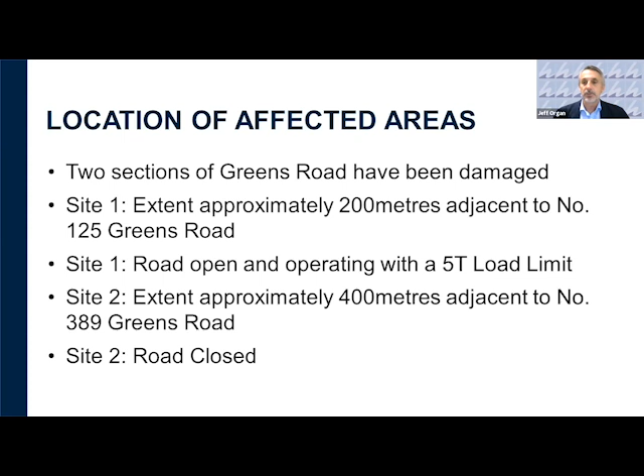So I'll probably hand over to Gareth now, who's doing the presentation. We engaged PSM - they're a highly reputable firm of geotechnical engineers that have done significant work for many years across New South Wales and Australasia. I'll hand over to Gareth to start his presentation.

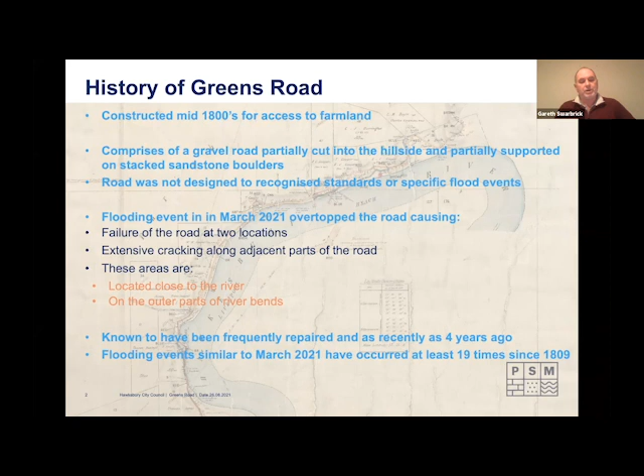That overtopping, as I mentioned, is a key factor — normally the road is able to largely sustain flooding, but in this case it has not. That overtopping is a key design event we want to be able to say we've designed our road for, that it can handle, because they can happen quite frequently. Anecdotally I think it's happening more and more, but we don't have enough historical data to prove that.

So Jeff mentioned the two sites — just to reorientate yourselves if you're not sure: we've got Site 1 down here, which, as Jeff mentioned, is just before Juniors, that's the one with the 5-ton load limit. Then Site 2 is further up, which is currently closed.

As we're saying, these are located on bends, but importantly you can get an idea of how steep that terrain is just the other side of Site 2 and Site 1. They're really in sort of nooks, tight spaces where there's not a lot of room to maneuver.

When I first went out there, there was actually around 80 meters of cracking. When we went back for a second inspection, that had grown to 260. When I say grown, it wasn't cracking we'd missed, although there was probably some of that, but the majority was new cracking. That instantly told us this was a site that had not finished — it was still moving and there were still effects ongoing.

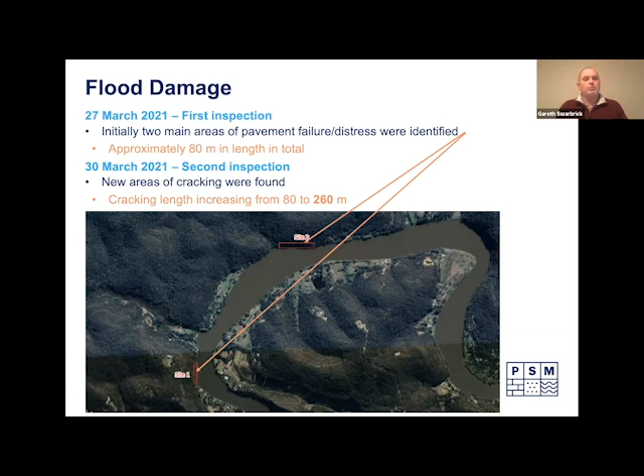The work we've done so far is to visually map the observable cracks. We have those in 3D in AutoCAD and GIS type programs. We've done drone surveys to provide high quality imagery and assist with the cracking survey, using the drone footage to go back and track the cracks and map them accurately in 3D space, so we can see where they are, what they look like, and how they've progressed over time. We did hand augering and penetration testing to bedrock, and you can appreciate the load limit applies to us as well.

So it's not like we could get machinery out there to actually do the sort of deep penetration testing that we wanted to, particularly in the short term. So a lot of that was done by hand when that was the only type of access we had.

We then were able to get a fairly light truck mounted rig that we used to drill, I think it's about 30 odd boreholes, and Greg can correct me if I haven't got that quite right. That's roughly how many auger holes we drilled, just to get an idea of what the site looked like beneath the surface. We also did some test pits with an excavator, which gives us a greater perspective, because you can uncover more material with an excavator. And again, they're fairly easy to use. But we had to be careful about the size of the excavator that we could use.

We also commissioned a bathymetric survey by a company out of Melbourne that could profile the riverbank below the surface - the riverbank, not bed, sorry. And so we used that in combination with our surface survey that the council had done as well, and we stitched that all together to try and get the most complete picture we could about what the geometry of the site looks like.

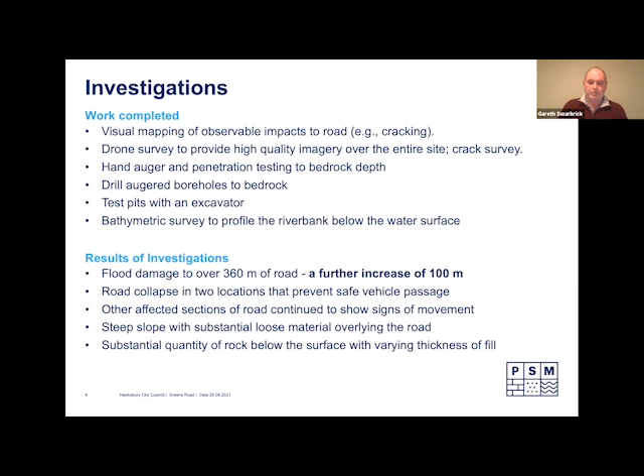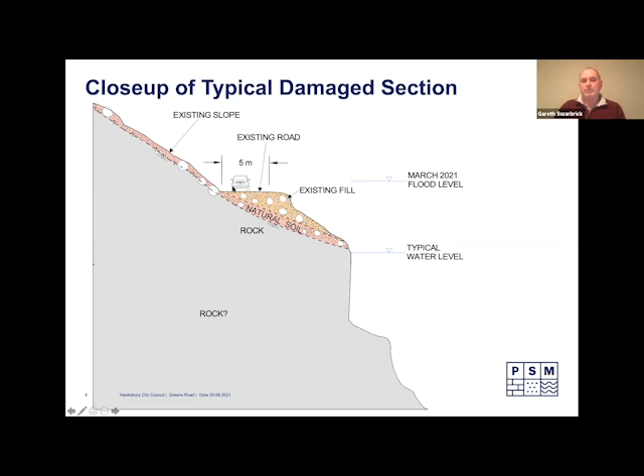If the water level stays down here, then we're not going to see much impact. If it goes above this, but not too high, it might cause some temporary wetting. But when it gets up to the sort of March 2021 level that we see here, we've completely saturated this fill, and then it becomes at its most vulnerable and weakest because of that water that's not normally there. Normally the water is diverted away from the fill in various channels and drains, and the fill is prevented from wetting.

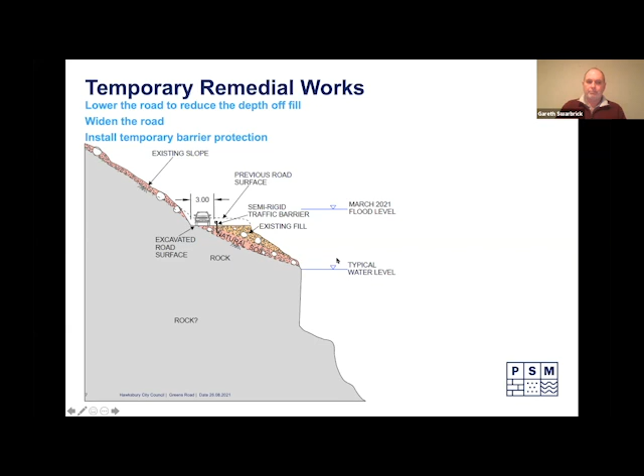So the permanent solutions, what have we been looking at? This is what we see the requirements need to be - as well as those obviously take those loads, which I haven't written here, but it's implicit in our design.

We need to make sure that whatever we do can sustain the traffic that's normally there, and also the construction traffic. So when you want to do repair works as quickly and as cheaply as possible, you often want to use the biggest machinery. So that's a consideration as well - we may be designing this road to sustain the heaviest loads it might be required to sustain, could be construction loads, for example.

But the other requirements we have - it's obviously got to survive these floods, and we see that as a key factor. So just going back and putting what's there now, as a group - and when I say group, I'm talking about the people at council and ourselves and others - we felt that it needed to have something that is going to sustain, be able to survive the type of flooding that we saw earlier in March.

It needs to meet acceptable standards. I'm an engineer, I'm bound by the codes of Engineers Australia, and so I need to put forward something that I feel meets the engineering standards of the day.

It's a very tight space, so we need to think about how we can construct in that space. You can see the drop-off we saw into the riverbed. We could try and build off barges. That could be a way of doing it, but that's obviously something else to think about in terms of cost, etc.

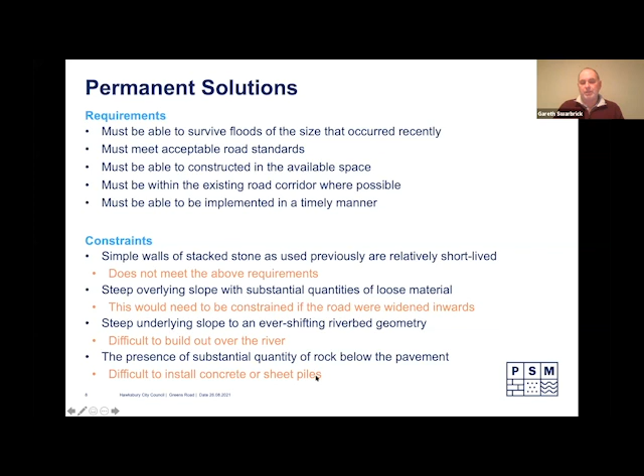Let's go through some of the solutions we've been looking at so far, so you get an appreciation of how they stack up with the slope we showed you previously.

One downside is that we really want the water to be able to come out of that fill if it gets overtopped, because if that wasn't allowed to happen, the piles would have to take the extra pressure of the water, increasing the cost. So there are a few things about piles that aren't necessarily conducive given other factors at our site, plus we have rainfall coming down the slope as well that we have to deal with.

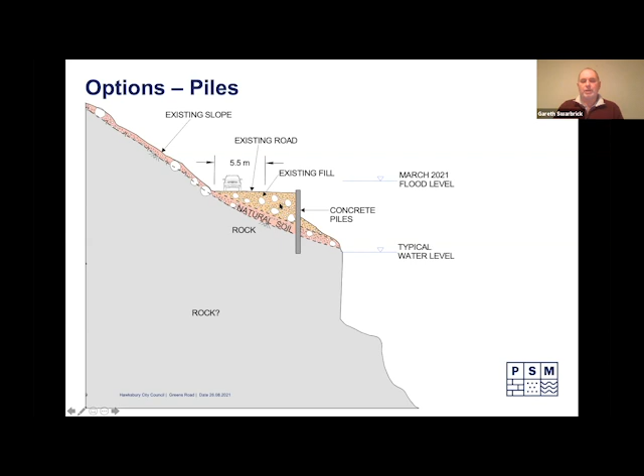This is another solution where you have piers, shorter piles which aren't cantilevered, providing a floating bridge deck type solution. It's a bit like the solution down near Stanwell Park, the ocean road that goes out over the ocean there. You can readily see that's probably quite an expensive option, but it is an option in terms of keeping cars safe and taking away the issues we've been discussing.

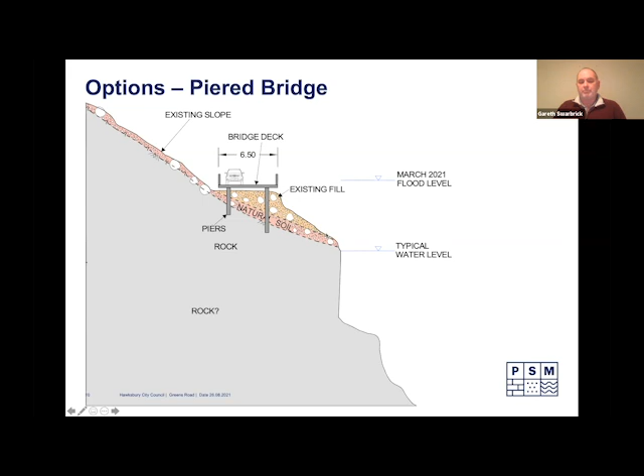There's another option looking at interlock blocks—a kind of stacked stone solution, but designed to be permeable and interlocked. They're at a fairly flatter batter angle, which means they can tolerate more load due to flooding and things along those lines. That's another option, and you have to design that also to be permeable to let the water through.

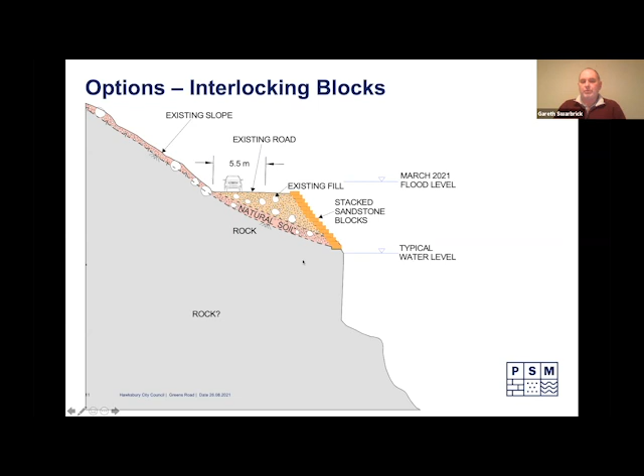There's also the option where you move entirely away from this area. So you then cut into the slope and have a shotcrete face with bolts or nails - we often call them that because they're often going into soil rather than rock. That creates a space through which you can have your traffic, keeping well away from the problematic area.

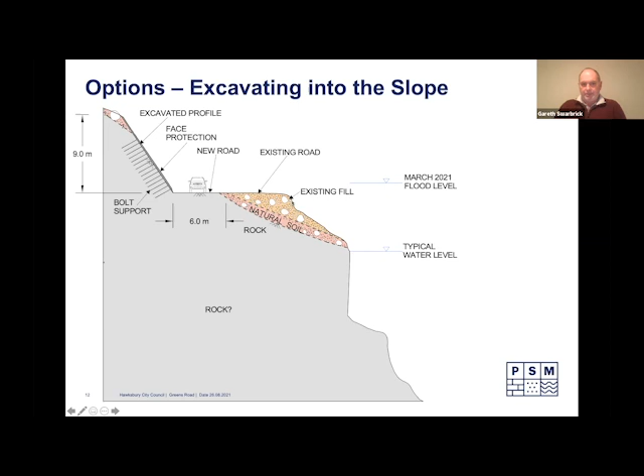This is another solution that may not be that familiar to many of you, and it's a different way of approaching the problem. What we have is a wall, typically created out of interlocking blocks, but the wall has connected to it reinforcing strips, and those strips are built up with the fill placed behind the wall. Those reinforcing strips actually hold the wall in place.

So you're creating a reinforced earth, and that's the terminology used for this type of material. That reinforced earth does a few things: it creates a fill which is a lot stronger and more robust than the fill would otherwise be, and it also has the ability to hold a more vertical wall. So this wall can be near vertical - typically it's 1 in 8 - but it gives you more space compared to, say, the block wall I showed earlier, which had to be flatter to create a more stable and safe supporting system.

So this is quite an attractive system because of this dual effect of the fill. It's also a system that can be built in a range of different conditions, and it's something that we find quite attractive at the moment.

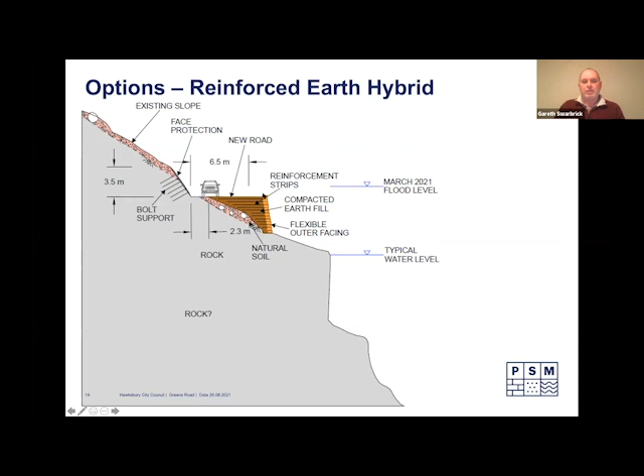And that's just the same solution. I think we actually missed one - there was a solution where we've only got the reinforced earth, apologies, and that comes out further rather than this combination. So this is really the combination between this cut and the reinforced earth, but you can imagine I could take that out a bit further if I wanted to avoid cutting into the slope in this particular location.

So that's the last of my slides - that's the solutions that we've come up with thus far. You can probably tell by the way I've talked more to this particular solution that I kind of favour this at the moment. It's got quite a few advantages associated with it, but we haven't set in stone which solution we're going to go forward with. Fairly recently we presented these to council to consider.

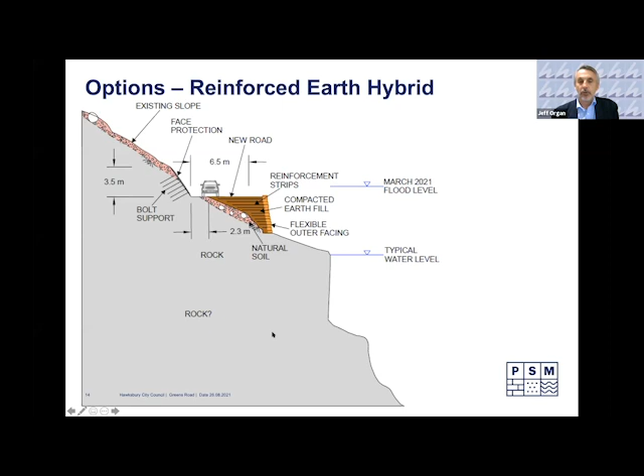Thanks, Gareth. As I said, the team have gone through fairly extensive work, and there's still a bit more to do to start to refine those solutions. Tonight's probably about getting some feedback from the community as to any issues that might be associated with some of those options - we're happy to take those on board when we get into the latter part of the evening.

I guess one of the things I've always taken away from Gareth's presentations and discussions is the fact that safety is really paramount - and you'll see that term used in correspondence. This is no longer a farm track. It does have vehicles on it of varying types - we've got school buses and all sorts of things, and we certainly know that community access is really important.

But one of the things I know as human beings we're really, really bad at is assessing risk. We all think that something is not going to happen, and that's something that, as engineers, we've been trained to understand is a failing - you've actually got to deal with that at a real level, rather than saying it'll be right, that'll never happen to us. So if we're risk averse in some of these things, we probably make no apology for that. I've said to a few people, I have no desire to be in the coroner's court explaining why somebody drowned in the river.

I think the other thing I've taken from some of the work PSM have done, you can see that vertical slope still sitting there below water level—that's not obvious to most people. The other thing I'd emphasise is that it's highly likely we're going to continue to get more movement of the river route itself. Both of these sites are on the outer bend of the river, and from an engineering standpoint, water in a flood will flow much faster around that outside curve—it's got further to go than the inside. That's why you typically get build-up of sediment on the inside of a river curve, and it's always eroding on the outer edge. It's those velocities.

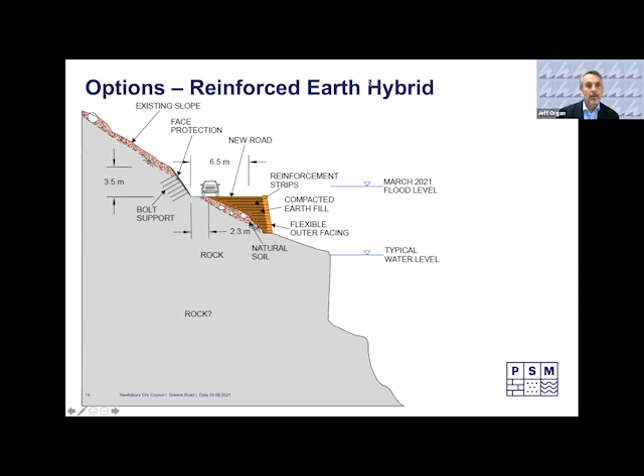So let me just go back to where we were. Share the screen again.

So the next steps we've got to look at are the options for remediation. We've gone through what we're terming interim or temporary works, and we've got to look at how we might implement those with minimum impact. What Gareth went through in those interim works is essentially cutting down the width of the road temporarily and cutting into the embankment. We do have some constraints on that embankment—we're not too far from the National Park, and there's property ownership there. It's not an easy thing to go and build a road in a national park for very good reasons. There are very strict protections on national parks, so we can't go too far in there, even if the engineering wasn't problematic.

So we think that if we were to do temporary remediation works at both of those sites, they'd probably take around 3 to 4 weeks. What we don't know—and whilst Gareth's done lots of drill holes and test holes—is that you can have anomalies between any of those points. So when we're doing those works, we don't know exactly what we're going to find when we start digging, particularly in what has been built up over many years. We're likely to find possibly some aberrations within that profile, so we can't be certain how long that will take.

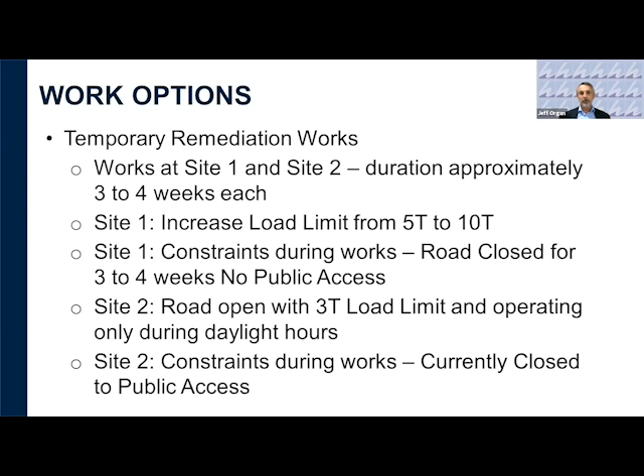And again, we'd have constraints during the works at site 2 as well. Probably not so much of an issue, other than the construction period would still need to remain closed—but that's no different from the current situation that's causing some of the grief.

As Gareth indicated, we're going through and doing that design work for both Site 1 and Site 2. There's probably a strong preference for an option within those we do have. A number of these would probably take 3 to 4 months at each site to construct, subject to no further cracking and the full extent of works being identified.

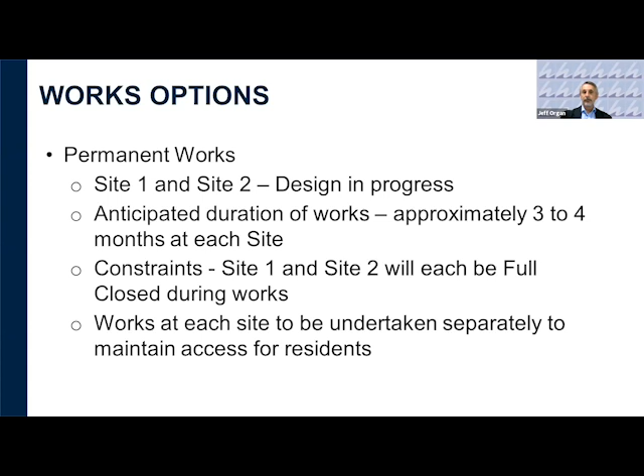Again, during construction, both sites would need to be closed to traffic. Obviously we could do them all together, but that would make access for all residents extremely difficult. It would also make construction probably a little longer because we wouldn't have access for our own purposes to get fuel, machinery and plant in. So sequencing is going to be key to minimising further disruption.

We had some phone calls from people saying we're not taking those things into account - we certainly are. With Option 1, we're proposing to carry out temporary remediation works at Site 2, the northern end, followed by the permanent works, before we touch Site 1. That would mean we wouldn't need temporary works at Site 1, but the 5-tonne limit would need to remain there. So that's the option - temporary at Site 2, then permanent at Site 2, then permanent works at Site 1.

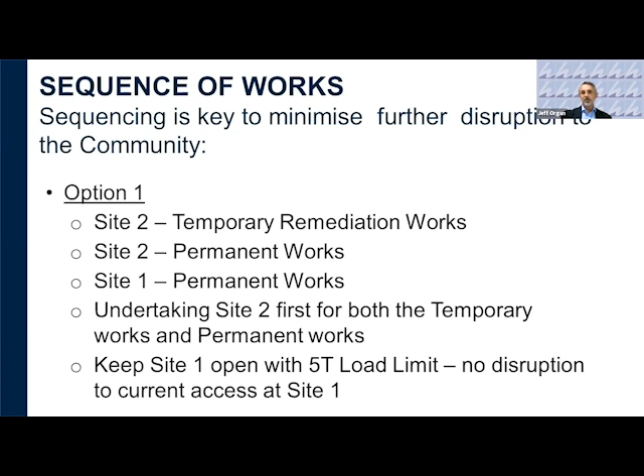The second option would be to stagger those. Again, we'd start at Site 2, do the temporary remediation works - weight limited and daylight hours only - then undertake the Site 1 temporary works after that. The problem with that arrangement is it means no access during night for anywhere north of Site 1, and they'd be limited to 3 tonne. That's another major impact. Then we'd come back, do the Site 2 permanent works, and then the permanent works at Site 1. Both sites would be out during that period for up to 3 to 4 months.

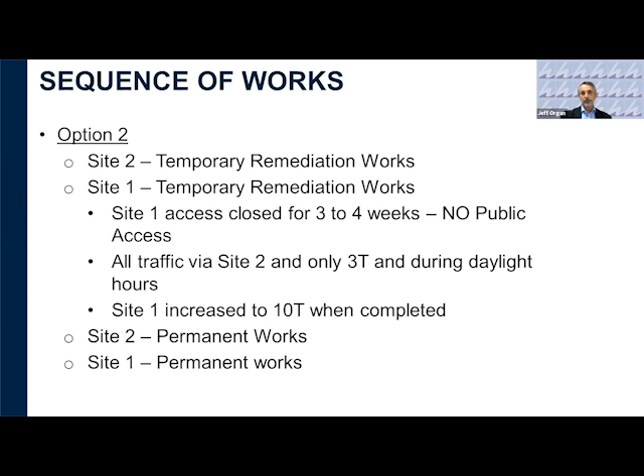It's fairly clear in my mind that Option 1 probably offers limited disruption, but means you're still going to have a 5-tonne limit at Site 1. The real question is that Option 2 has the negative of denying night-time access to the juniors area. So the trade-off, in blunt terms, is that you leave the 5-tonne limit as it is at the area south of juniors, and leave that until the permanent works.

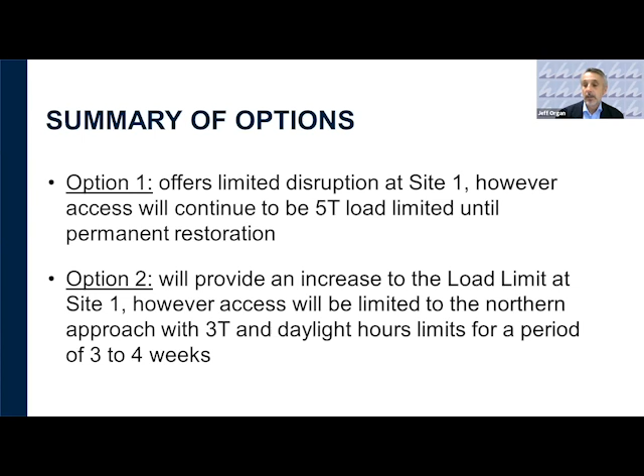It's just too disruptive to go in and carry out that interim works. That gives probably the best access for more continuing access, so it's preferred. Again, I'd stress that the timeframes we've been talking about are all subject to weather conditions and the site constraints we might find.

We'd be looking, subject to finalising our construction plan - we're talking with PSM about the plant and equipment required to get things done quickly - to try and get that commencing next week at Site 2. There'll be no further disruption to the community at that point other than undertaking the works, and we'd be looking at probably 3 to 4 weeks of work there, subject to the conditions.

What we'd like to do, and tonight's probably the first part of that, is undertake further community engagement, both on the final design solutions and to take a straw poll on the preferred option of not undertaking any further works at Site 1 until we've got full access available back at Site 2.